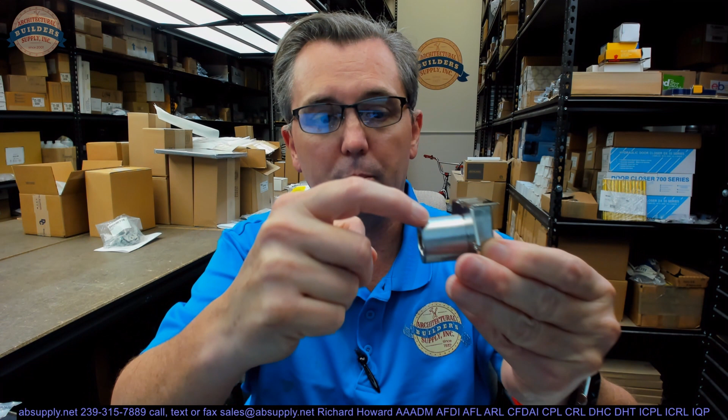This includes not only the lock, this is in the 26D finish, so the exposed part is satin chrome. Okay, it also includes the construction core, the plastic operating core; those two holes there will go into the two posts of the drive member there. Slide that in. You'll be able to throw your bolt. Pretty simple, pretty straightforward. Okay.

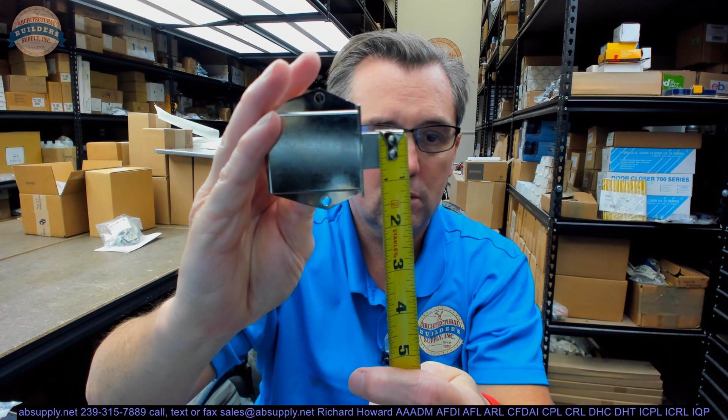Let's take some basic dimensional properties, and then we'll look at the screw package. Let's see. Well, overall height of the unit itself with the mounting flange, it's about 2 5/8. Overall width looks like it's right at about 2 1/4. The projection of the bolt looks like it's about 3/8. The height, about 11/16. Its thickness looks like it's about 5/16.

Okay. It's going to include, let's take it out of the package. First of all, a strike plate. You're going to mount this so that the bolt is making contact with this small little piece of metal. Overall height, about 1 7/8. Overall width, about 11/16. It's quite thin material, probably 55 thousandths. Survey says, ooh, way off. 40 thousandths, 0.040. It's also going to include a couple of small screws for getting it attached.

Okay. You're also going to get a couple of screws for attaching the lock body. You're also going to get a spacer, this piece of black plastic that's here. If you are using a 6-pin cylinder in this, you will need the spacer. Drop that in, then put your 6-pin core into the housing itself.

If you're using a 5-pin, which I've never seen one, but they exist, you'll need 2 of those spacers. Best can sell you additional spacers if Olympus cannot. They might be able to. We'll look in their catalog. If you're using a 7-pin length, you will not use the spacer at all for that.

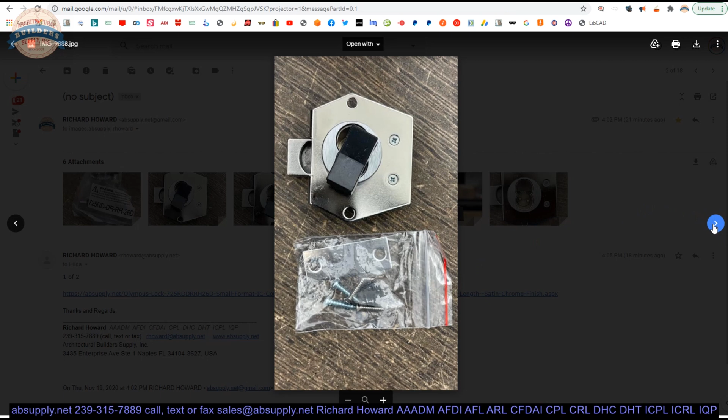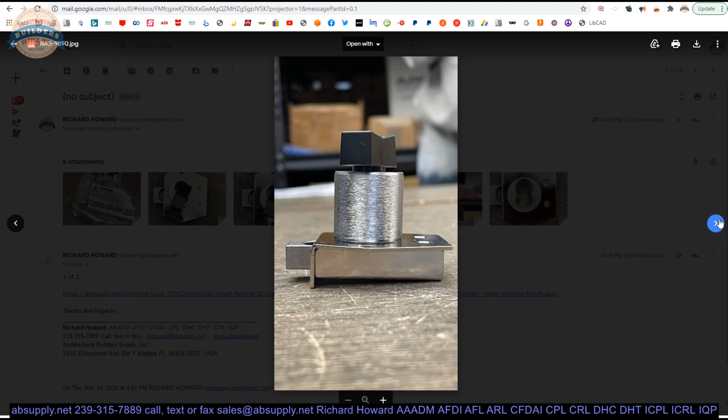Here is the item that we are looking at. Let's take a look at some photographs that we have linked to down below here. In the packaging, everything in the packaging, showing you the construction core with the bolt thrown. That would be looking up from the floor. Side view, so to speak. Close-up of what would be called a figure 8, a small format prep. That's here.

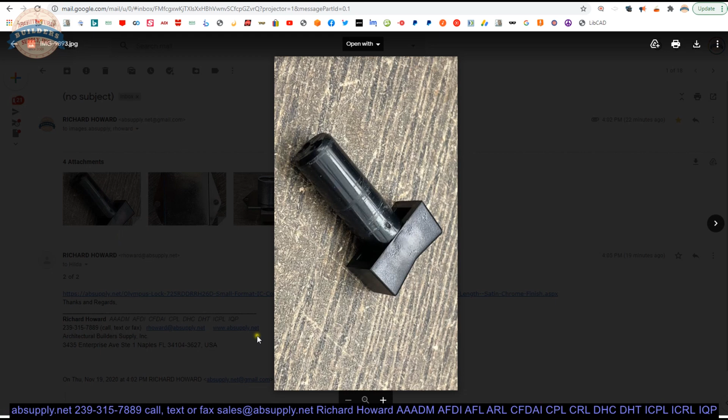Best, Frank Best, the founder of Best Lock, patented this design, cloned and copied countless times by many people over the decades. We have another construction core that's here. They call it a construction core because it allows you to operate the bolt not only during the installation period to make sure that it works correctly and that you've installed it correctly, but also to operate the door until the permanent cores come to the site.

They're inexpensive. You can use those as a construction core, meaning it will just operate until the permanent cores, versus having actual pinned construction cores, which we can supply as well. So if you wanted to have something that required key access, we could supply you with those easily. The back side of the unit, showing the bolt a little bit clearer, I suppose.

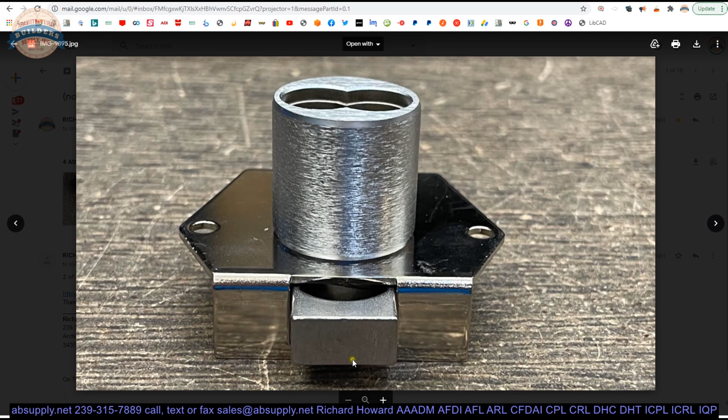And then, of course, your strike, your disc, your shim. I'm drawing a blank on what the proper term for that is. And then your 4 screws needed for installation. Now, there's lots of good stuff below. Let's take a look. So this is a small format IC core, Best, Falcon, Arrow, all of the clones, 5, 6, or 7 pin will all work.

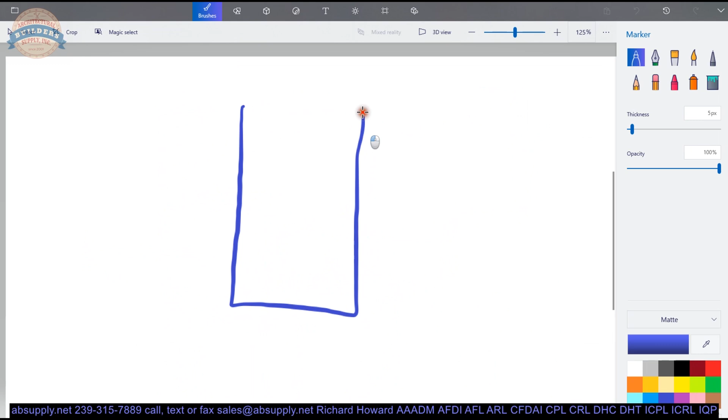It's a rim-mounted lock. The term rim-mounted means that it's a surface-mounted lock that is installed on the perimeter of the door, is the way I think of it. So you've got a door. Let's say that this is the perimeter of the door. Okay. Rim locks are generally installed in that sort of fashion. Deadbolt style, not a dead latch. Key removable in locked or unlocked position. That means that it's not key retaining.

They say that standard locks are non-handed. Well, this one's handed. And while you could install it in other orientations, your cylinder won't be in the proper orientation when all is said and done. So you want to be sure to order the correct hand. This is a retrofit for the 5L7RD by Best. That is very likely the lock that most people are familiar with.

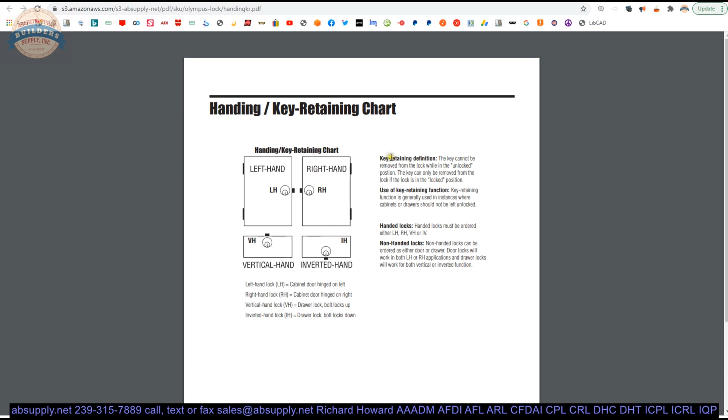Barrel diameter, 1 1/8 inch. I didn't measure that stuff, but if I don't forget, I'll measure it before we terminate the video. It includes the spacer, that's what I meant to say. Your rectangular strike. Your plastic actuator, which is what I'm calling a construction core.

Cores are not included. This will accept anyone's small format, whether it be Best or Falcon, Arrow, KSP. Schlage makes a small format core. Countless others do. Medeco does. Yale does. Everyone's locks and housings go into everyone else's, pretty much. Sold as each. When you buy one, we'll ship you one. Let's start here at the catalog page. Pretty simple and straightforward, which is a hallmark of the Olympus catalog.

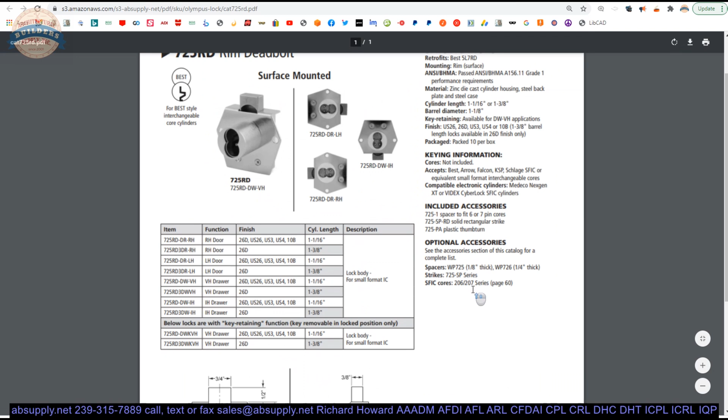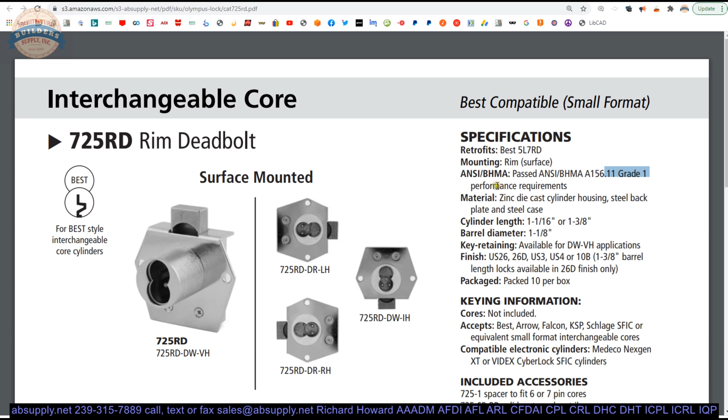So you're seeing the concept here of what the handing looks like. Vertical, I think this is called inverted. It's a grade 1 lock, and I'm just scanning through here to call to your attention what's important. Finishes: polished chrome, polished brass, satin brass, oil rubbed bronze. 1 3/8 barrel length locks available in 26D only.

What does that mean? That means if you have a thicker door. So the cylinder length is standard at 1 1/16. So if you've got something 3/4 inch, that's going to project out a little bit. But if you had something thicker, they can do 1 3/8 length in satin chrome only. There's no cores included, so you can key it any way you like when you supply the cylinders, and anyone's small format will fit in there. High security, standard cores.

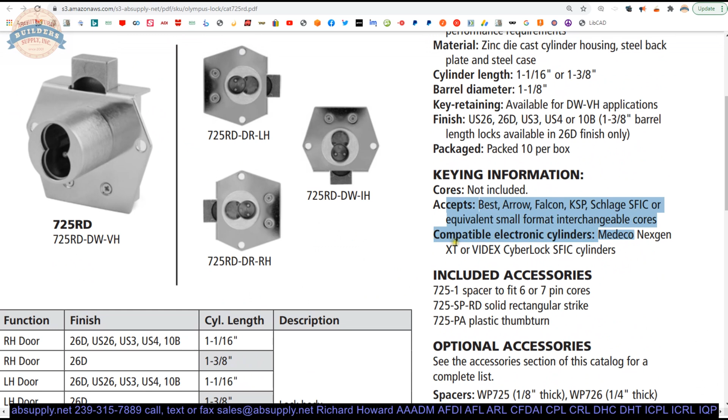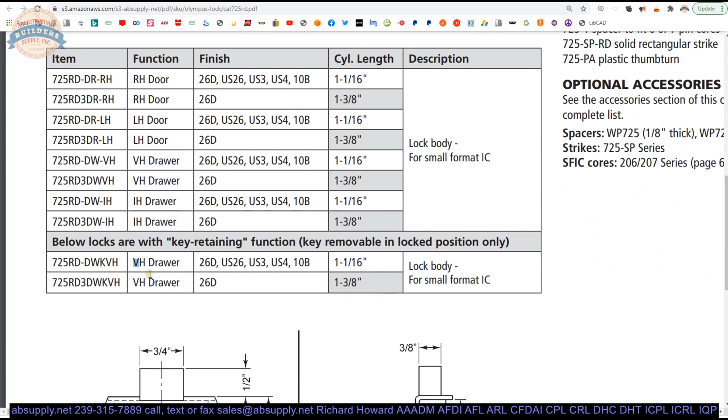Now, a chart here. This will allow you to break it all down in terms of what's available. We did mention key retaining. They can do the key retaining in the VH version only. And what that means is when you insert the key and unlock the deadbolt, you cannot pull the key out until you throw the bolt back to locked.

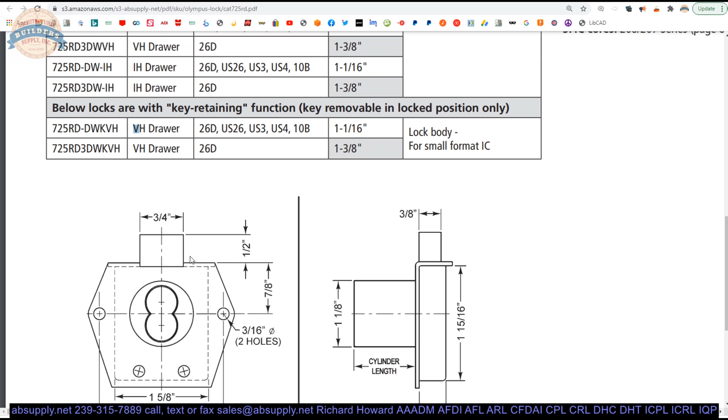If you want to be sure that you've never left it unintentionally unlocked, like maybe a laboratory in a school, doors to chemicals in a chemistry lab, you might want those always to be locked. There you go. Key retaining is what they call that. All right, the next document will be the datasheet. Just a different version of what this is going to look like.

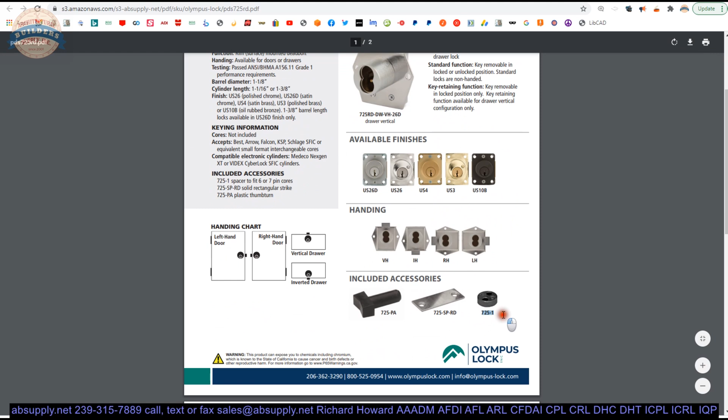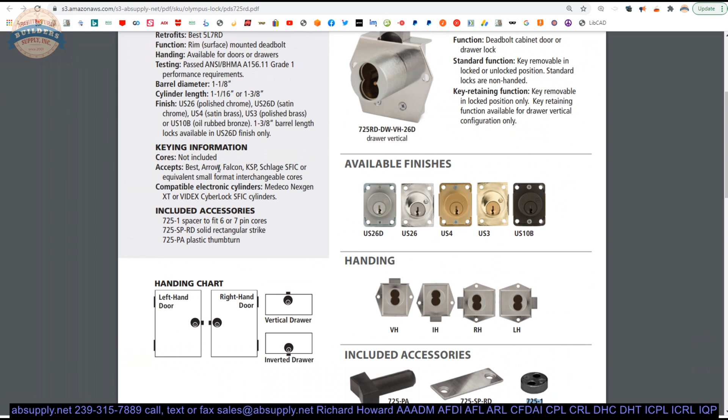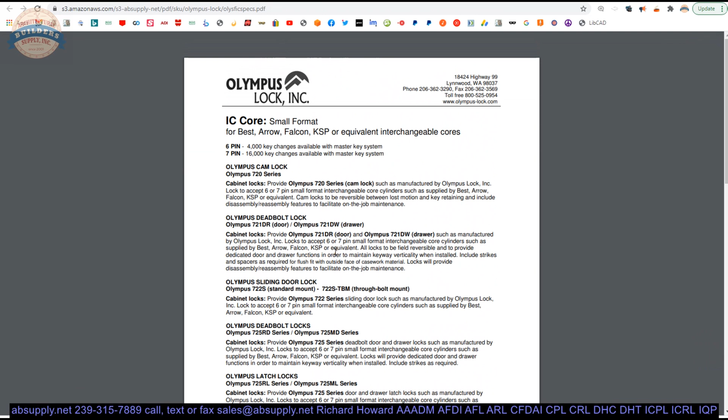So there's really no reason to go over these items other than to say that clearly they will sell you the spacer separately should you need those. Will it work without it? Yes, but you should really have the spacer installed so that there's no play on the core at all. That's why they put those there. Architectural specifications. That is if you want to include documentation in your construction documents that quite clearly calls this material out. There's your source material.

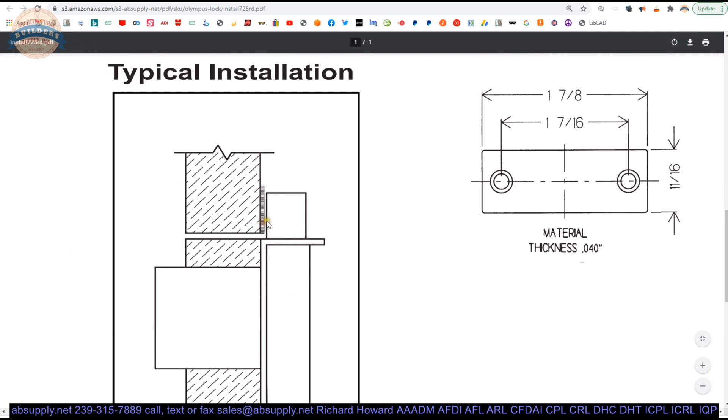Installation instructions, pretty simple. What you need to know is how large of a hole to drill and at what sort of backset you need to drill it. With a lock like this, you're clearly wanting the edge of the lock body to be flush with the edge of the door. That strike will be surface mounted on the inside of the jamb, as mentioned earlier. The diameter of that body, 1 1/8. So what are you going to drill? Very marginally larger than that. Your experience will tell you how much larger.

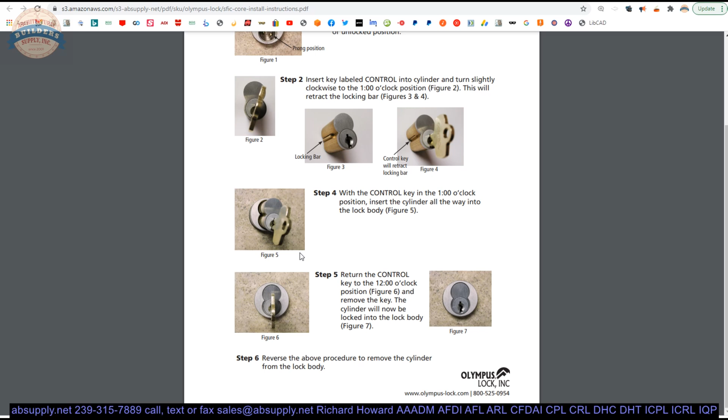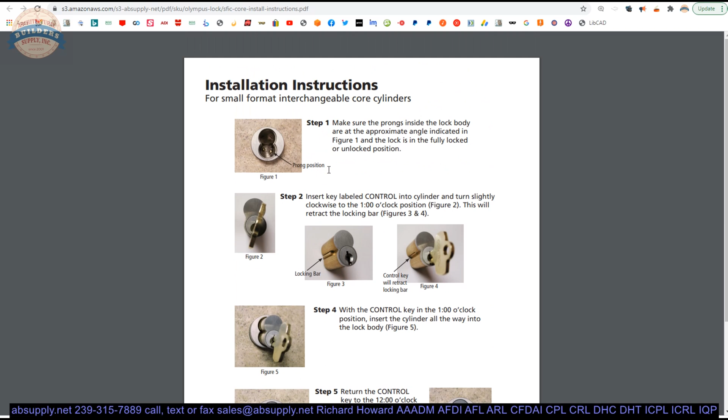Medeco has a very unique control key on their interchangeable cores. Schlage and Yale's are very similar to each other. Corbin, Yale, Sargent, they all have different ways the control key works. But we're talking about small format here, and as far as I know, all small format will work the same way.

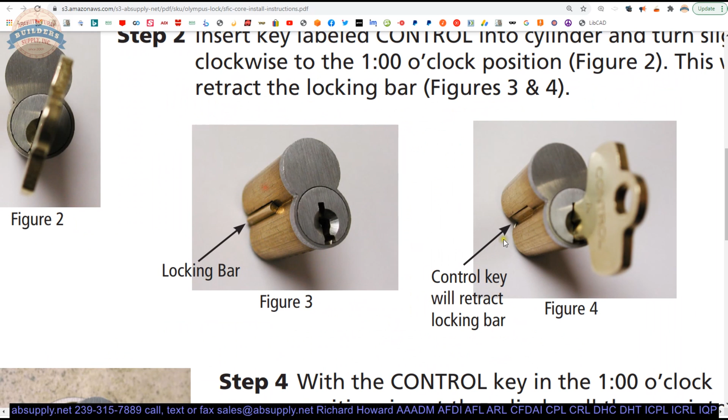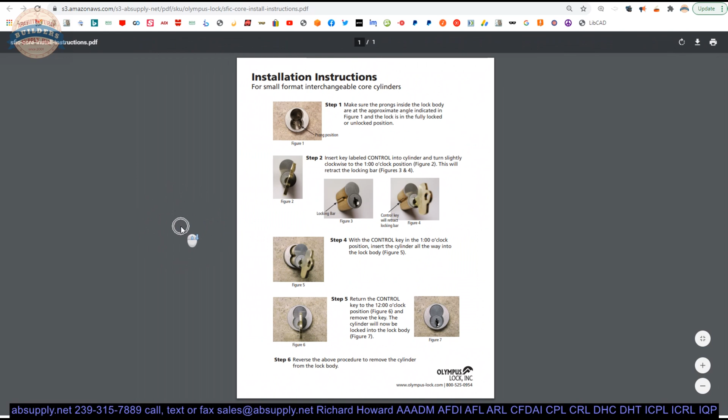The control lug, they're calling the locking bar, is on the left side. You rotate that clockwise 15 degrees to draw that in. You'll insert the core in, then you'll turn it back vertical to throw the lug back out, as they're showing in step 5. Pull the control key out, and you're in good shape. That's how that works. Suffice it to say, we can supply you with the keyed cores as well for these locks.

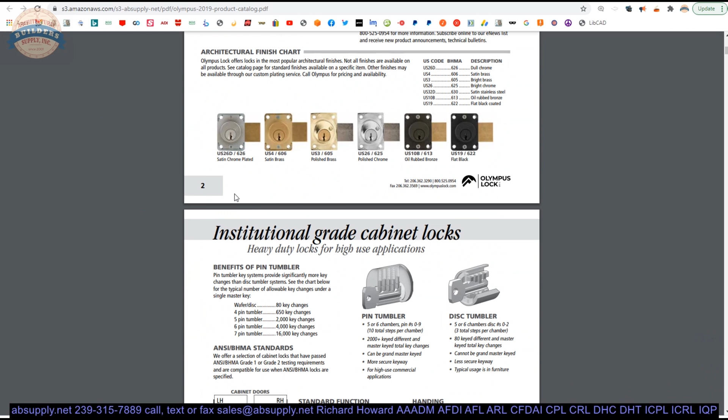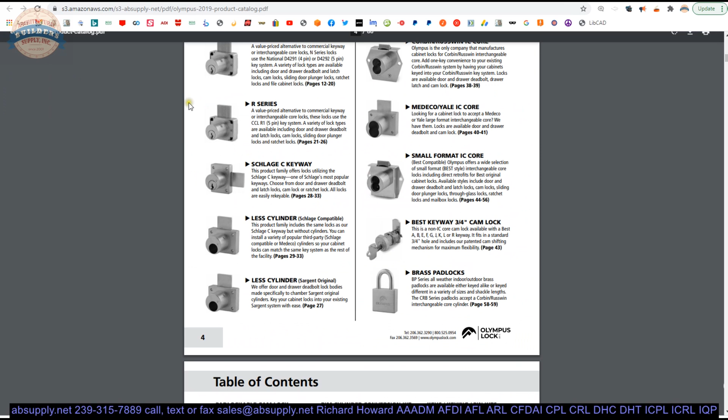Now, you're not going to buy from them a $3 cam lock, because that's not what they do. They make high-quality material. So if you're looking for cam locks that are high quality, this would be the way to go. A retrofit for a mailbox would be a great option for an Olympus product.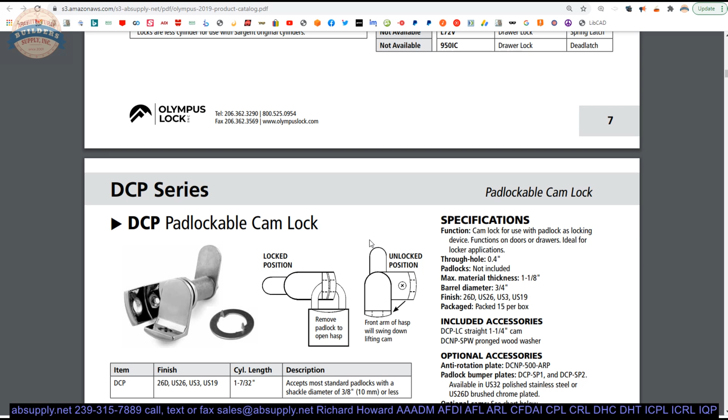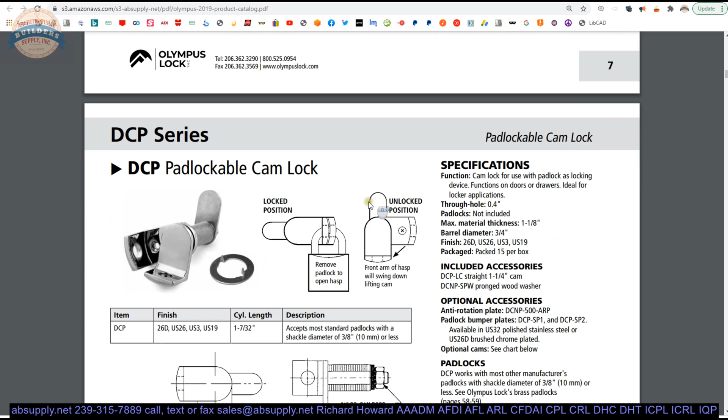I recently had a ranger from a national park need a few dozen high-quality cam locks that he could install into, and I forgot what he was installing it into. It may have been some sort of parcel lockers that could take a robust key. He was having trouble with the inexpensive cam locks he was buying, that they were shearing the bows of the key off. So we were able to get them into Olympus cam locks, and they've been very happy ever since.

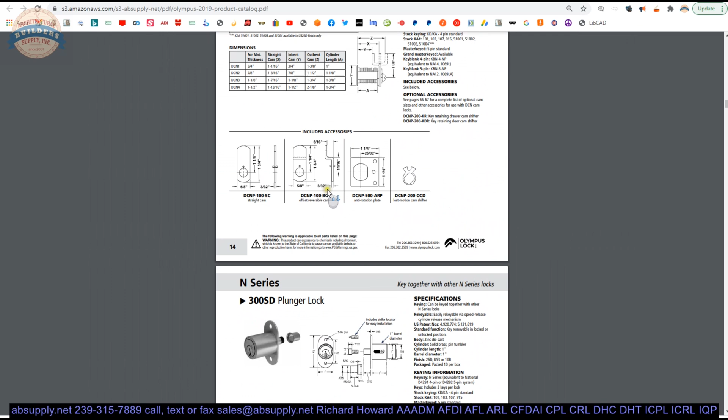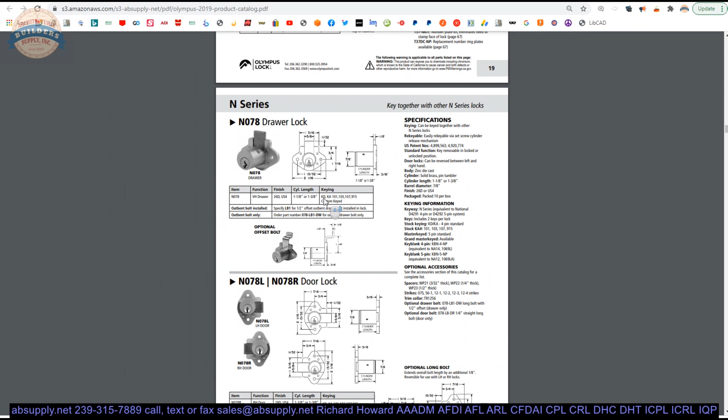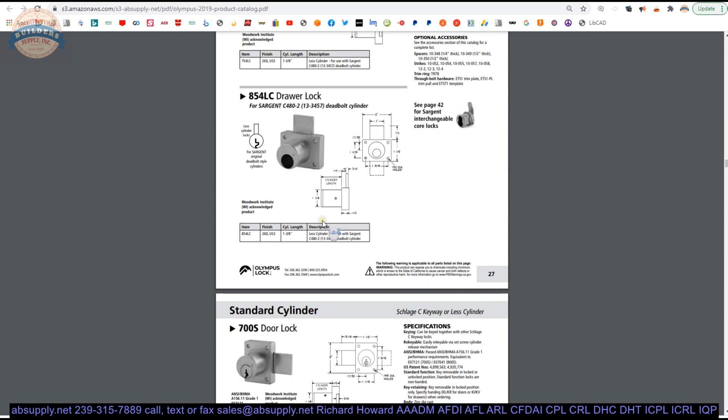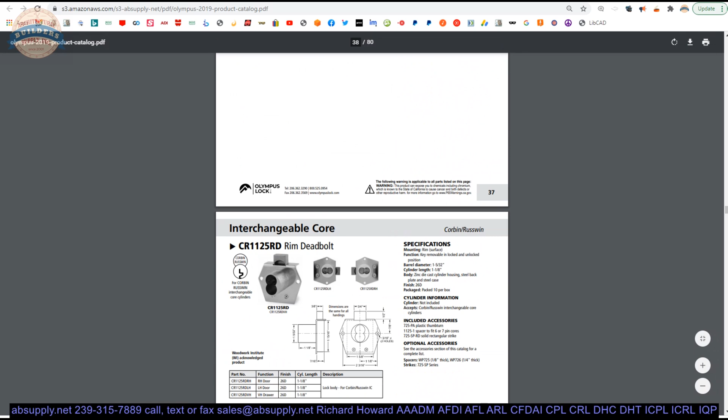And the point is as you go through this, you might find that, gosh, I didn't know I could get that kind of material. And you'll notice that the material they make is very familiar to you, but what may not be familiar is the higher quality than what you might be accustomed to with the lower quality items. Showcase locks, plunger locks, latches, bolts, things of that nature. So it's quite a deep dive into the world of, in air quotes, cam locks. Okay. There you go. So let's wrap up this video.

In conclusion, it's not only a nice quality product, but it's a confluence of value and great technical support, along with relatively short lead times. And Olympus hits all of those criteria. You will definitely find their material in architectural specifications when it comes to a hardware package.

Like us, if we're the door and frame supplier on a project, and we're supplying doors and frames and hinges and locks, cylinders, keyed cores, they might say, yeah, let's get those 60 locks for all the casework, because you're supplying the cores. Get those lock bodies on there as well. And that's where Olympus will really come in very well. And I'm quite sure that that's very commonly how their material is applied on such types of projects.